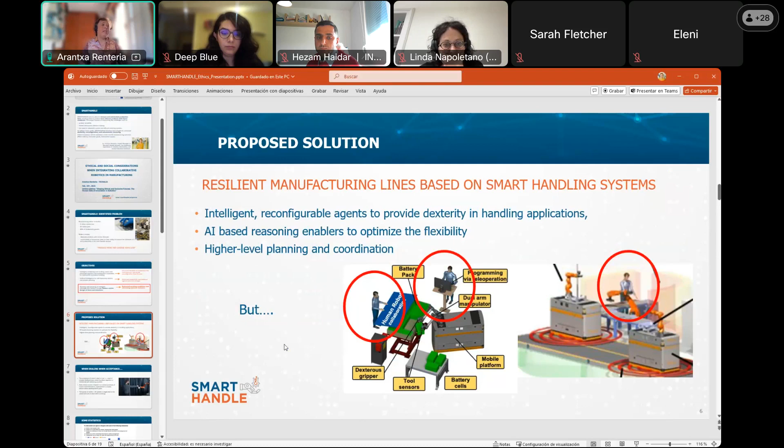We will have people working together with collaborative robots, and this implies a lot of problems of acceptance, of safety, and everything. Why? Because we have the problem that a person and a robot must collaborate in a way that the worker has enough reliance on how the robot behaves when it is moving around people. There is a complex communication and feedback loop between the worker and the robot that must be clear enough for the worker to trust and to feel safe when working and moving around a collaborative robot.

What we can see is that now, with the integration of artificial intelligence within robotics, there is more and more risk for the operator, who maybe doesn't know how the robot will respond to a specific posture of the body or hands. The worker is trying to see what will be the next step the robot will take, depending on their position or the gestures they make with their hands, arms, or whatever kind of communication between the two, the robot and the worker.

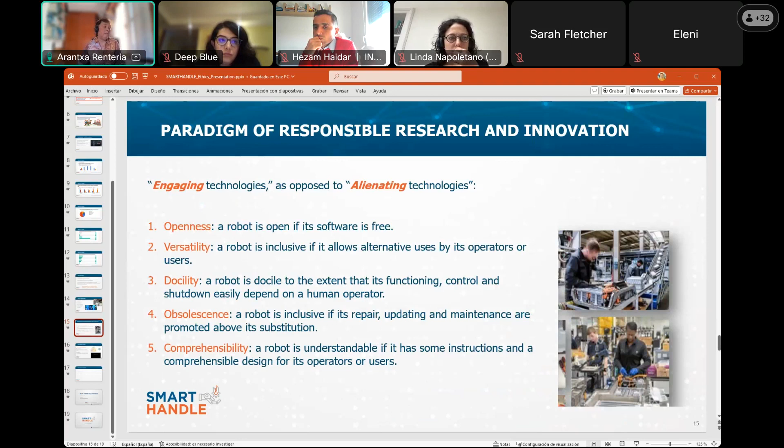In the case of Smart Handle, focusing on the analysis of how to integrate the human worker within the manufacturing lines we are developing within the project, we have designed the so-called human-centered design guidelines. We have developed about 25 or more guidelines, more or less classified into three groups: taking into account the human characteristics, the task characteristics, and the robot characteristics. The manufacturing line should be defined taking into account the task.

The humans' cognitive and physical abilities should be well utilized and well used, and the human worker should perceive the contributions and be sure that he has control over the work of the robot, so he or she feels valuable and impactful.

Also, a good balance between the responsibilities of the human and the work of the robot should be established, so the human feels that he supports the robot, but when he needs something the robot is able to react in time, maintaining a good balance between the tasks performed by the robot and the worker. The robot should also provide enough feedback to the human to ensure the collaboration happens in time and with the exact information required.

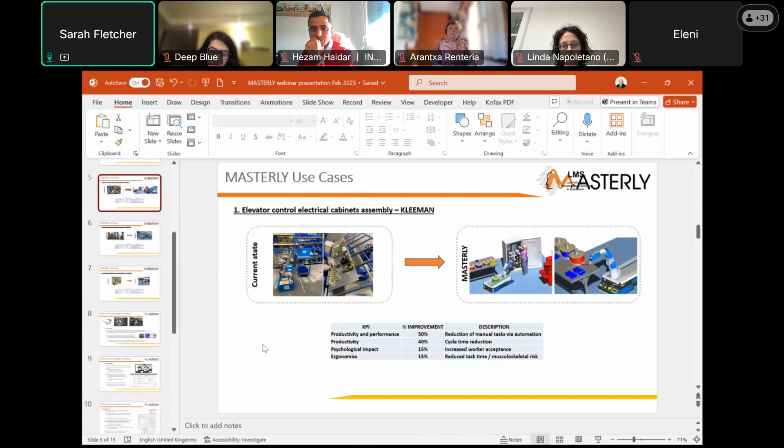I'm focusing very much in this presentation on the human-centered aspects. So we're aiming for reduction of manual tasks via the implementation of robotics by around 50%, improvement in productivity in terms of cycle time reduction of 40%, which isn't necessarily a human-centered approach, but it relates to the other issues below, which is to focus on psychological impact and increasing worker acceptance of the new systems by 15%. The cycle time reduction is also a key driver of improved ergonomics by reducing task time and musculoskeletal risk, so reducing the amount of time the operator is engaged in posturally or physically demanding strenuous activities that are not very conducive to well-being.

Reducing manual strain like the Kleeman case, and focusing on improving the human enjoyment of the task, allowing them to focus more on the quality control and skilled aspects of the task, and removing the physical manual handling strain.

We have a productivity and performance target of about 80% improvement by reducing the manual tasks using automation, reducing cycle time, increasing worker satisfaction and acceptance, and achieving the 15% reduced musculoskeletal risk target.

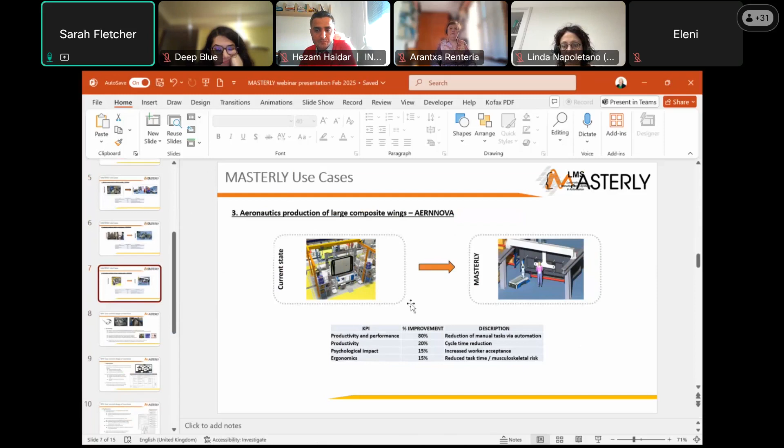The Aernnova use case task currently involves quite heavy manual handling, moving large components in aeronautics around. Our target is to implement a human-robot system which is not as collaborative as the other two use cases, because the aim here is to replace that heavy manual handling and the risk of injury and collision it involves, focusing on allowing the human to conduct the smaller assembly tasks, the more cognitively skilled tasks, and take away that dangerous heavy lifting.

There you can see some human-centered KPIs, and the description of the improvements we're trying to achieve, very similar to the other ones.

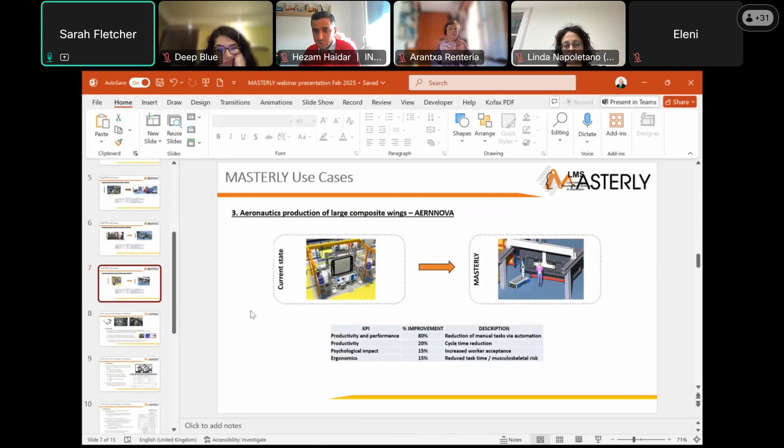Moving on to what we are doing in terms of the human-centered analysis. In work package 1, we engaged in some user-centered requirements capture, and in work package 4, we focus on user-centered design of interfaces. For that, we have adopted a three-stage, or three-spoke, methodology.

One aspect of the methodology is to really focus on understanding what the human currently does. We believe it's very important, before doing any design and implementation work, to understand the tacit skills involved in operations. We can look at standard operating procedures and work standards to understand what the system designers intended people to do, but we know people don't tend to stick to those very rigidly. In many cases, there are often deviations from standard operating procedures.

For good reason, we know that operators tend to adapt things because they want to make it better or easier for themselves, for personal reasons—maybe their physiology or natural abilities—or because they find a better way than was originally designed.

So we want to understand that, and we use eye tracking for that, where we get operators to perform their tasks wearing eye trackers, which gives us the operators' own perspective of the task being executed. It gives us a good combined field of view, horizontal and vertical. These eye tracker systems involve accelerometers, gyroscopes and magnetometers, which accurately track eye gaze and compensate for head movement.

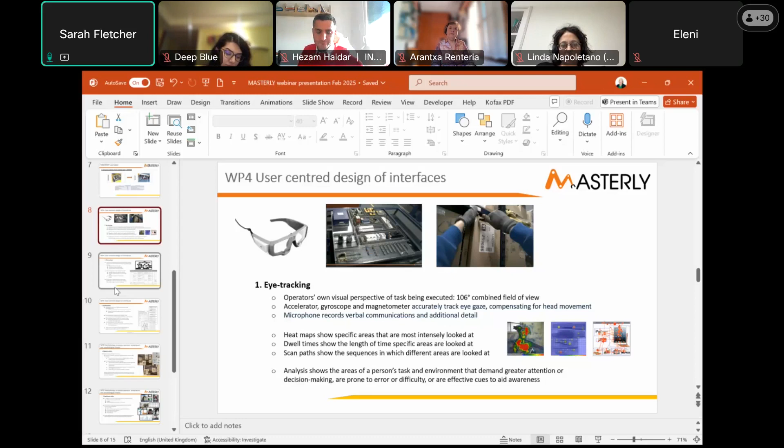And we find that eye tracking not only gives us that objective output, we can also use that recording for playback to the operators if we want them to tell us how they do things. Because a lot of what they do is based on tacit skills and non-technical skills, they're not always aware of that procedure. It's like we always use the example of driving your car to work. There's a lot of aspects of that journey you wouldn't be able to tell us about if we asked, because it comes naturally. But if you recorded it, you'd be able to explain, well, this is the indicator for when I turn right. You'd be able to recall more about the decisions you made and the task process you undertook.

So the second part of our work package for user-centered analysis was to conduct hierarchical task analysis, based on the eye tracking videos. Hierarchical task analysis deconstructs manual processes into individual component steps at various depths of scrutiny that suit the analysis, and it helps us reveal deviations from standard operating procedures. It helps us identify decision-making points and indicate process change potentials, where we identify problem areas and where we might need to design those out when we redesign a process to use a robot.

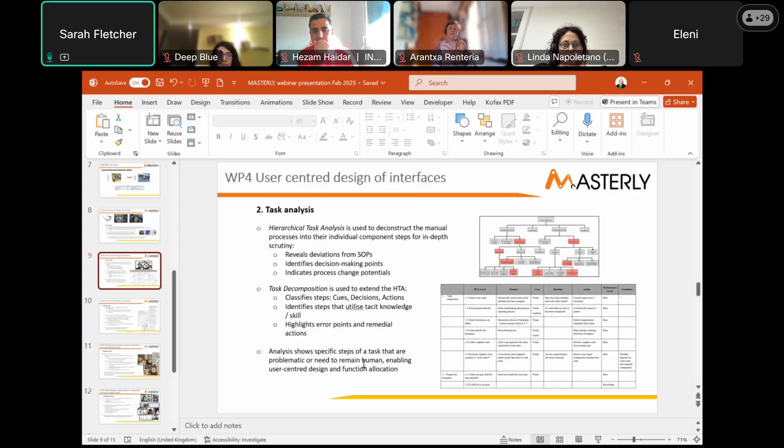We also use task decomposition, which is an extra layer that extends the HTA by providing another layer of analysis that classifies steps into things like cues, decisions, actions. So we can identify the steps that utilize tacit knowledge and skill. That's important because tacit knowledge is often the part of a human operation that shouldn't be transferred to robotics. It's that sort of skill and creativity that only a human can bring. It helps us highlight error points and identify remedial actions that we can integrate into the redesign of the process. This analysis shows us the specific steps of the tasks that are problematic, which helps us engage in user-centered design and more effective function allocation.

The third part of our user-centered analysis is the application of psychometrics. We use psychometrics to capture current levels of psychological states, indicating potential areas of concern in the current processes. This also provides us with a quantitative baseline data set against which we can measure impact in future assessments. So gathering a baseline of how people are responding to the original manual process means that later on, when we implement our solutions, we can measure again and assess the differences, hopefully showing improvement and helping us assess whether we're achieving those KPI targets I mentioned earlier.

We use various psychometric tests. We tend to use reliable and valid assessment tools that are already available because they have proven validity and reliability levels. Three key ones used in Masterly are the physical discomfort scale, because we want to assess the difference in ergonomic, postural, physical differences between the as-is manual task and the to-be one after we've implemented solutions. We measure mental workload because we know that's very important to how satisfactory a new system is, and we are not targeting a blanket reduction in mental workload at all.

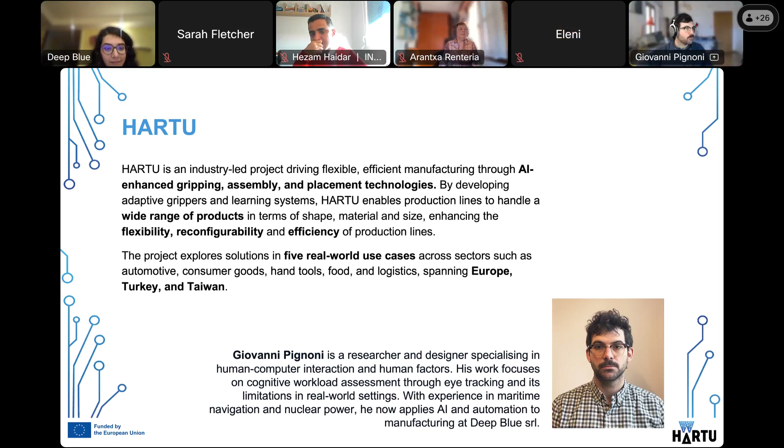Okay, so hopefully you are seeing my slides. Yes. Okay, so, well, let's start with a short overview of what I will present today.

We'll start by talking about what we intend when we talk about human-AI teaming in the manufacturing field. Then I will show you our human-AI teaming interaction model, go through the various blocks that compose it, and then give you an overview on how we are using and plan to use the model in various use cases.

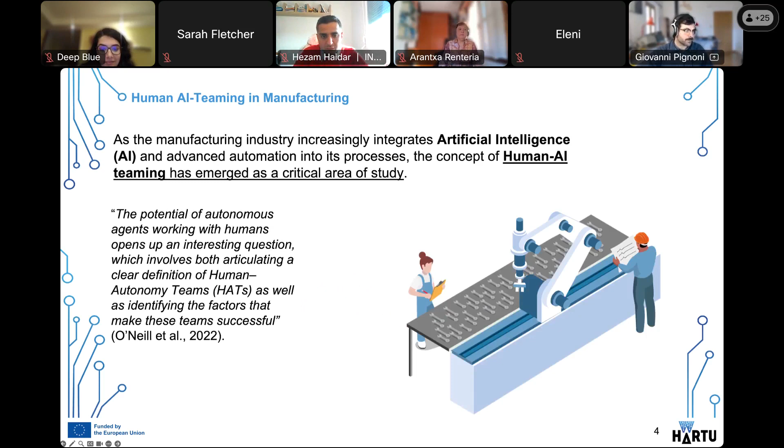So let's start by the beginning. The beginning is that there is quite an interest in introducing advanced systems that include artificial intelligence in manufacturing. Teaming has emerged as an area of study because this sort of system creates, or rather enables, interactions

that are a bit more akin to interacting with other human workers rather than the old paradigm of a worker interacting with a tool. So when we talk about teams in manufacturing, we talk about teams that involve two or more members, some human operators and some AI agents.

And these AI agents have a level of autonomy sufficient to make them recognizable by the human operators as distinct entities that can have a role and responsibilities within a task. So again, something that is more similar to operating with another worker rather than having control over a tool.

Now, the level of autonomy is something that can vary a lot. So we start from something that has very low autonomy, like a personal assistant that is only doing things if we are asking them, and perhaps only giving a suggestion, to autonomous agents that are able to take decisions and adapt how they operate independently with no human involvement. So on this spectrum, we still talk about human AI teaming.

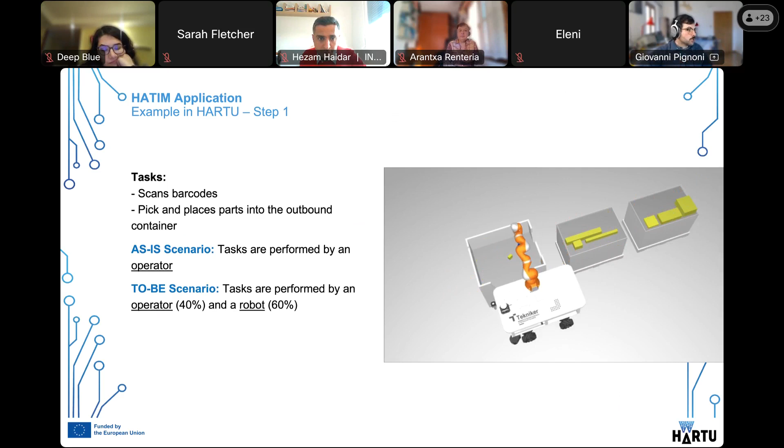Perhaps document the as-is scenario, how the task is being now carried out by the operator on his own, and how the task is expected to be at the end of the project, the to-be scenario. In this case, perhaps we have an idea that the task is still going to involve an operator. The robot should do most of the work, but an operator will still be there in some capacity.

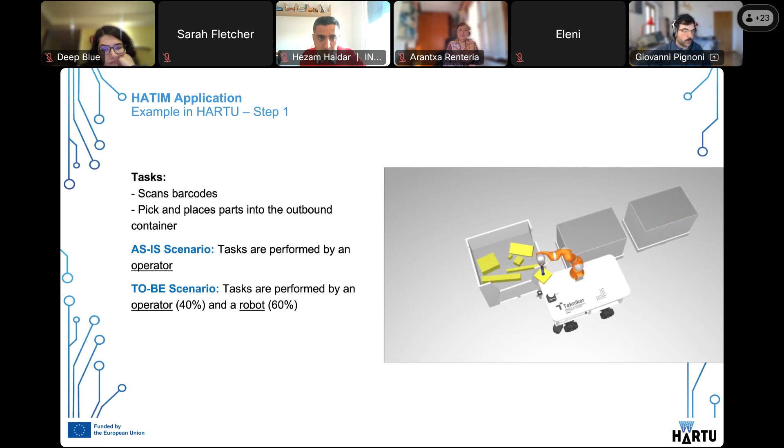So we know there is a form of teaming, and we can go on with this information and refer to it as we go forward in the project. After we have a solid basis of gathering all this information from the other stakeholders, perhaps we go through the design stage of a project.

In this stage, the model helps us as a repository of information, because we refer to what we collected earlier, but also it helps us in mediating the design. I think a good example of the mediating process is the work we have done with the definition of roles. The definition of roles starts from the need of being able to discuss in plain words with the other stakeholders and define what we expect the two team members to do.

So we have created a narrative model of teaming, a narrative model of the roles that basically creates, or we try to map at least a comprehensive list of roles that the AI agent and the operator could have in a team, and allows us to do a discussion.